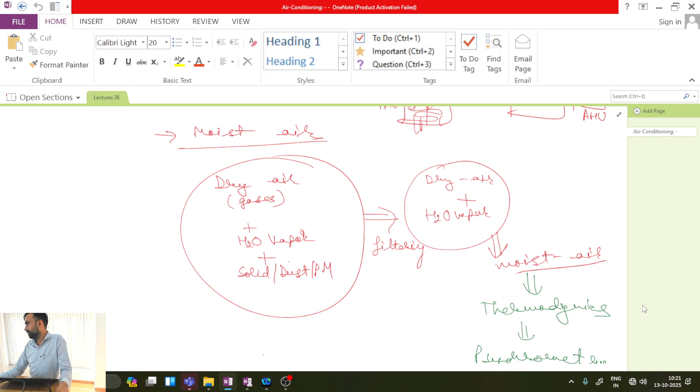We have been discussing air conditioning in the previous lecture. Let us continue our discussion on the same. So, in terms of air conditioning, I mentioned that we may have comfort requirements or industrial applications of air conditioning, and depending upon the function, the season, and the distribution of the equipment, we have studied different classifications of air conditioning systems. Of course, whenever we were discussing all these classifications, we discussed in a broader sense. We did not go into much technical detail of the system.

So, in order to design an air conditioning system and to understand all its technical details, we must have the knowledge of properties of moist air, because ultimately moist air is the participating medium in addition to the refrigerating system which is used for processing of the moist air.

So generally in our atmosphere we have dry air which includes many gases. If we talk about the atmosphere, what is the composition by volume? 78 to 79% of nitrogen, 78 point something. So if we do the approximation, then almost 79% by volume is nitrogen and 21% by volume is oxygen. However, these percentages are 78 point something and 20 point something, and in addition, close to 0.98%, we have many other gases such as CO2, argon, helium, etc.

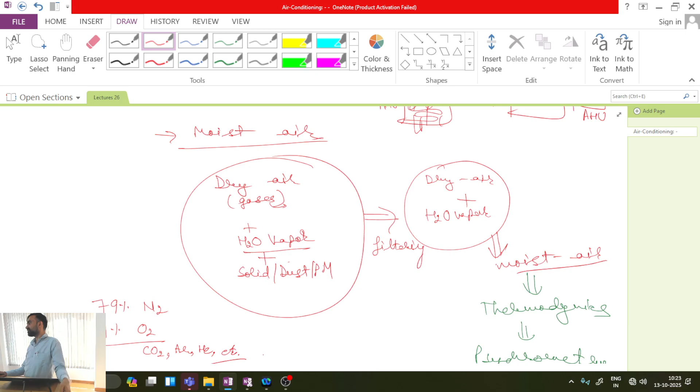However, whenever we are processing the air for certain industrial applications and human comfort conditions, our first criterion is that these components must be removed. When we remove these components, ultimately we will have dry air and water vapor. Now, purely on human comfort conditions, we cannot survive in a scenario where we have only dry air and no water vapor. So for human comfort conditions, relative humidity close to 54% or 56% is required. So for different industrial applications as well as human comfort conditions, there must be some fraction of water vapor present in the air.

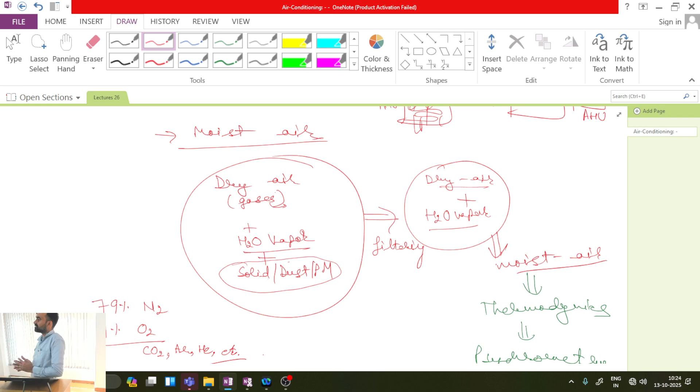Dry air is a mixture of different gases, and the boiling point of these gases is very low. So for all the gases, nitrogen, oxygen, carbon dioxide, etc., we are significantly away from their critical point. That means, relative to their critical temperature, their temperature is very large. And we know from the generalized compressibility chart in thermodynamics that all gases whose temperature is significantly larger than the critical temperature mostly behave as ideal gases. Is this clear? So for all these gases, I can assume ideal gas behavior.

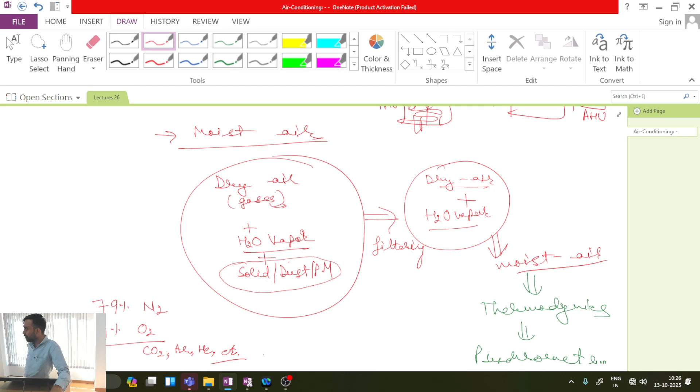However, I do have water vapor present, so I also need to determine the properties of the water vapor. We know that water vapor under certain conditions can behave as an ideal gas, but it cannot behave as an ideal gas for all temperatures and pressures. That's why we need to properly estimate the properties of this moist mixture of dry air and water vapor. So the science that deals with the thermodynamics of this type of moist air is referred to as psychrometry.

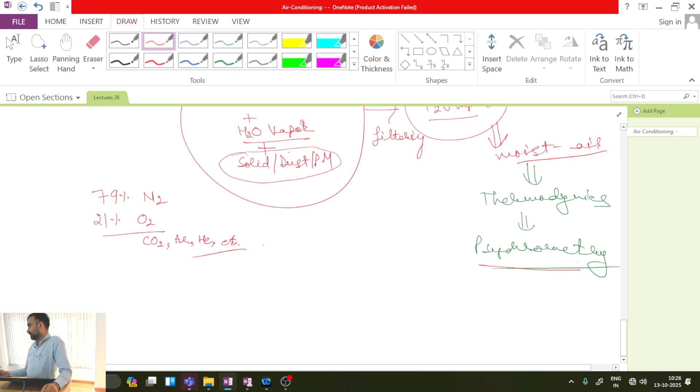Now let's talk about psychrometric behavior. But before that, let us clarify some of the common terminologies. Whenever we deal with mixtures, there is one important law which is known as Amagat-Leduc's law. Can you tell me what this law is? If I have a mixture of gases, say A, B, C and D, and I apply this law, what will I get? If I consider this classroom with 4 different gases A, B, C, D, what will I have?

Of course, the room will have some total pressure. The total pressure of the room will be the sum of partial pressures of all the components A, B, C and D. And if the mixture is properly mixed, the temperature of the mixture will also be almost the same. Is this clear? So if I assume the same total pressure P and the same temperature T, and I segregate out A, B, C and D, what will happen?

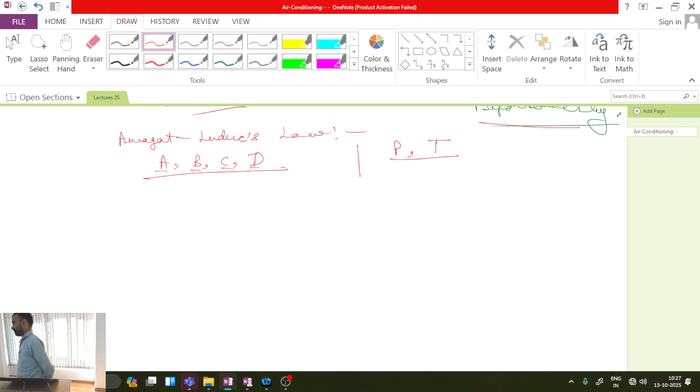Whenever all A, B, C, D are present as a mixture, say these are forming total volume V at pressure and temperature of P and T. Now, if I segregate all the gases such that the individual component is having pressure P and temperature T, what will I be getting? Right now, their total pressure will be nothing but partial pressure of A plus partial pressure of B plus C plus D. Right now, that will be forming the total pressure.

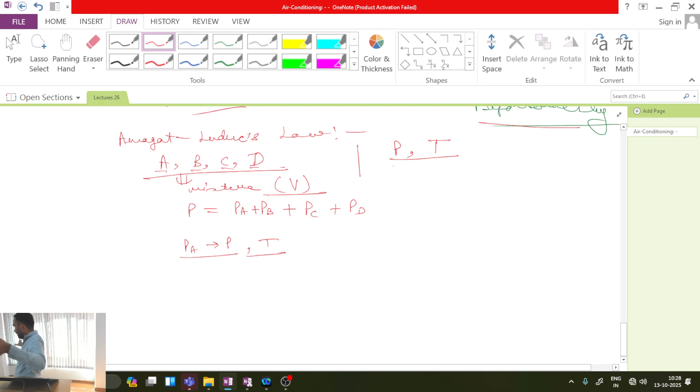But I am saying that if the partial pressure is made equal to P, okay, at the same temperature T, what will be happening? Right now, all the gases A, B, C, D were occupying the entire room. But when I am segregating gas A, then gas A will be occupying some lesser volume in order to produce the same amount of pressure. Is this one clear?

So ultimately I will be finding that, say this is VA as the volume of gas A at pressure and temperature P and T. Similarly, VB is the volume of gas B at the same pressure and temperature. Likewise, VC and VD. What ultimately will I be getting? As a mixture, their entire volume will be V at the same pressure and temperature T.

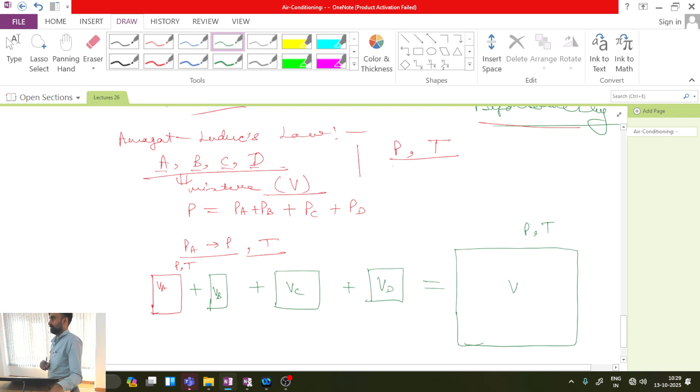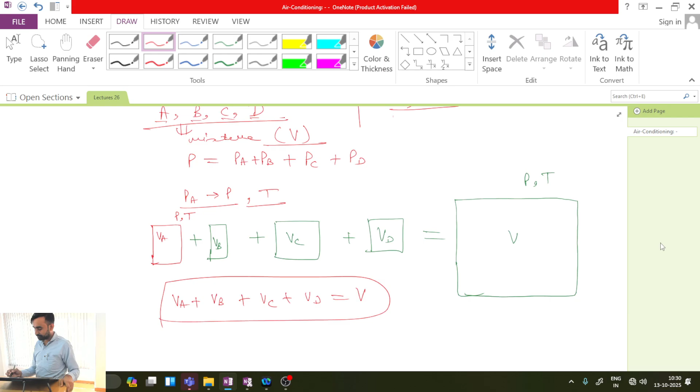Is this one clear? So, Amagat-Leduc's law says that if I maintain the same pressure and temperature for individual components as that of the mixture, the sum of their partial volumes will be equal to the volume of the complete gas mixture. Is this one clear? Anyone having any doubt about this? Please tell me. All are clear with this?

Then next is Dalton's law. What does Dalton's law say? What are the constraints now? Have you not studied Dalton's law of partial pressure for gas mixtures? Studied? So what does it say? Yes. First point is volume and temperature have to be same. So if you maintain same volume and same temperature, then for the same total V, so this was total volume and this was temperature.

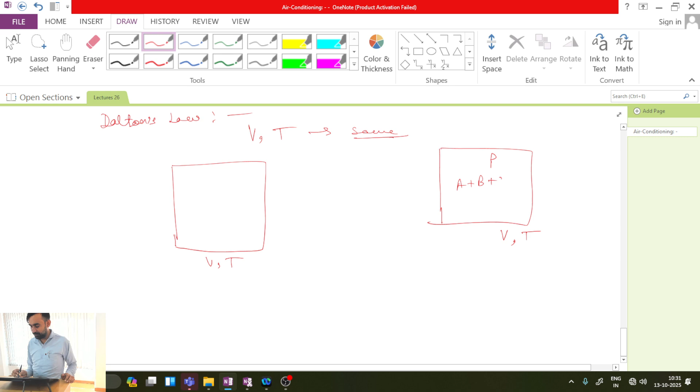Say total pressure was P. Now if in the entire volume V and temperature T, instead of taking the entire mixture A plus B plus C plus D, I only take single gas A, what will be happening? Pressure will be less. Okay, so its pressure will be equal to PA. Likewise, if I take only gas B, then pressure will be PB, PC, PD, and if mixture pressure is P, then it is for sure that PA, PB, PC and PD will be less than P.

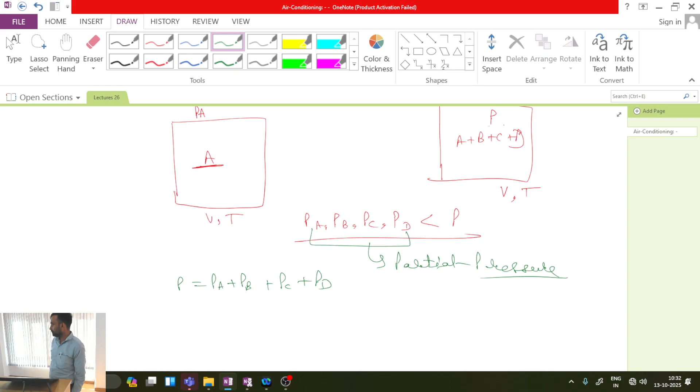Okay, so the pressure of a particular component at same volume and temperature is called the partial pressure. Is this one clear? At same volume and temperature as that of mixture, whatever pressure the individual component applies is called its partial pressure. And the sum of the partial pressures is the total pressure, PA plus PB plus PC plus PD. Is this point clear? So these two laws are very, very important for deriving the properties of moist air. Is this one clear?

Now let's come to moist air. In moist air, I have two components: one is water vapor and the other is dry air. Is this one clear? Water vapor and dry air. So in order to understand the properties of moist air, we first must know the properties of dry air and of water vapor. And as a combination, whatever properties I get will be defined as the properties of moist air. Is this point clear?

Typically, dry air at ambient pressure and temperatures near ambient can be easily treated as an ideal gas. And I have already told you why we treat this as an ideal gas: high temperature in comparison to its critical temperature. Okay, so relative to the critical temperature, temperature is high. Relative to ambient, it may not be high.

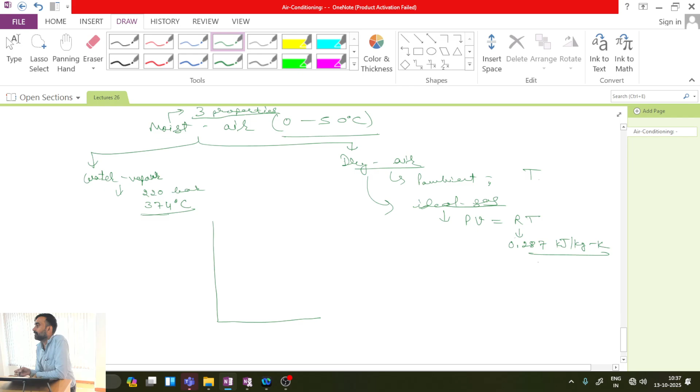Is this point clear? Now we know that if we have some gas which is just following ideal gas behavior, then enthalpy will be only function of temperature. Is this point clear or not? For dry air, enthalpy will be strongly function of temperature. Okay. Now, this dry air is close to ambient pressure and ambient temperature, and mostly in air conditioning applications, we will be operating in the range of 0 to 50 degrees Celsius.

Okay. So, for the range of 0 to 50 degrees Celsius, my specific heat of air, Cp of air, can be assumed to be 1.005 kilojoule per kg Kelvin. Is this point clear? So Cp is a fixed value, 1.005 kilojoule per kg Kelvin. Now, because for air conditioning I am operating from 0 to 50 degrees Celsius.

If I assume that for dry air I have set my reference state at T equal to 0 degree Celsius, what I will be getting? Please tell me. If my reference state is T equal to 0 degree Celsius, what I will be getting? Let's assume enthalpy at this point is 0. Enthalpy of the dry air at T equal to 0 is nothing but equal to 0 kilojoule per kg. So this I have set as reference state.

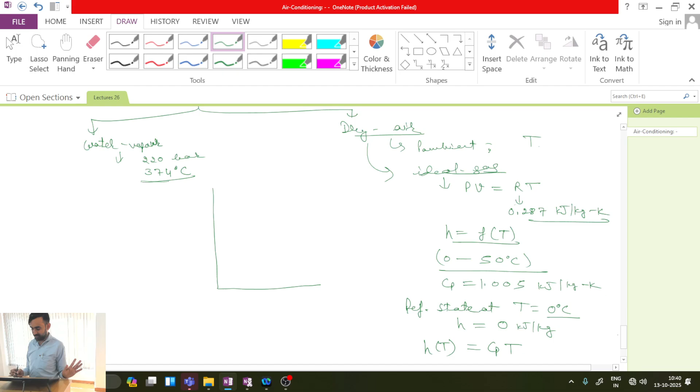So now if I have to calculate enthalpy at any temperature T, can I simply write Cp times T? Because H at T minus H reference, which is 0, equals Cp into T minus T reference, and T reference is again 0. So H I can simply write as Cp into T for my air conditioning applications. So the enthalpy of the air can be simply written as 1.005 times temperature, and unit is kilojoule per kg. All are clear with this point?

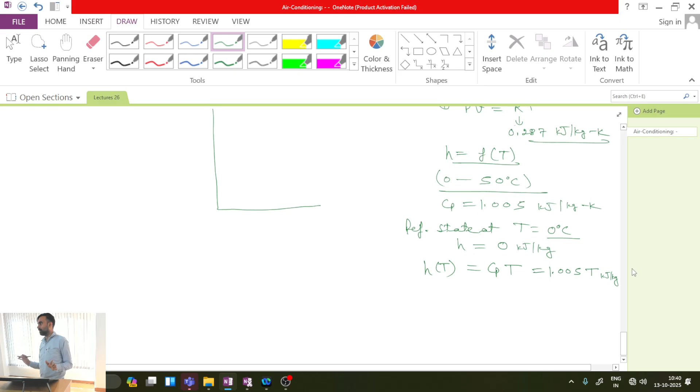Now let's talk about water vapor. If I plot temperature entropy diagram for water vapor, the range of temperature in which we are operating is less than the critical point, because this is my Tc. And as a whole, we are majorly interested in enthalpy, because enthalpy will be actually participating in different processes, and that too, whenever I am talking about

the moist air, in moist air, my water will be always present in which phase? Liquid or vapor? Liquid phase. In moist air, water will be present in which phase? In this air, there is some water. It is in which phase? Vapor phase. Okay, so on this TS diagram, I must focus mainly on the vapor phase.

So if I go to vapor phase, this is constant enthalpy line in the vapor phase. What is your observation? These are different constant enthalpy lines, for example, H1, H2, H3, H4, H5. And what are constant pressure lines? These are constant pressure lines. Okay. So in upward side my pressure is increasing.

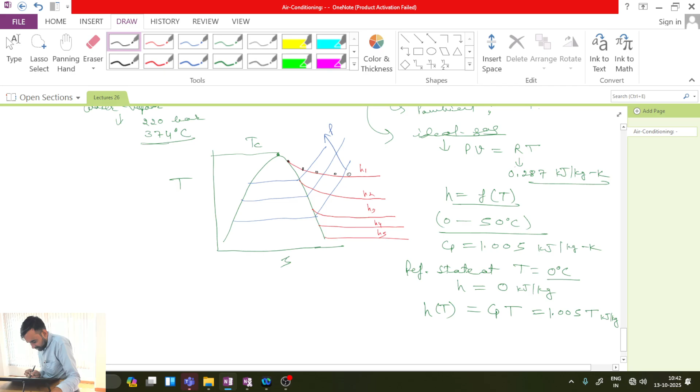So when I am operating at nearly higher pressures, you can follow any of the line and you will be finding that enthalpy is both function of temperature as well as pressure. Okay, because whenever you are moving from this point to this point, your enthalpy is changing. Is this point clear?

From this point to this point, when you have come, your enthalpy has changed or not? You have moved from some H0 line to H1 line. Okay, so your enthalpy has changed, pressure has also changed, temperature has also changed. So it means at high pressures, enthalpy is a function of both pressure and temperature for water vapor medium. Okay. However, if I go to very low pressures, in the low pressure zone, now you see, at a given temperature, the value of enthalpy is what?

Line is horizontal. So this entire line is having the same value of enthalpy. And at this particular temperature also, the enthalpy is remaining constant. At some other temperature also, some other unique value of enthalpy. So if I keep on moving pressure lines over here, I am moving towards the low pressure side. So now if you see, at this pressure line also, at this pressure line also, enthalpy is the same. So if temperature is constant, then enthalpy is not changing with the pressure.

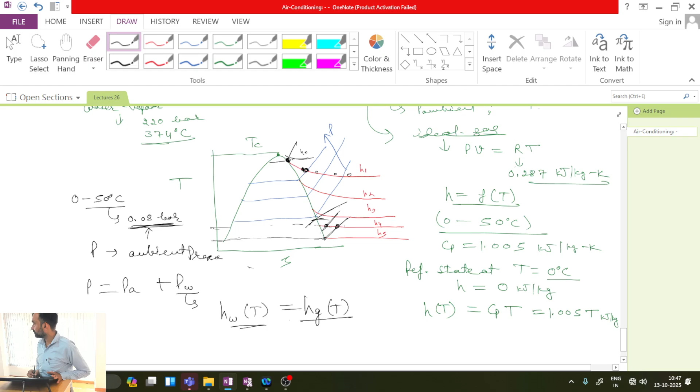Now let us consider that I have Ma as the mass of dry air and Mw as the mass of water vapor, and together these form M, which is the mass of moist air. Now you tell me, what will be M? Ma plus Mw. All are clear with this point? Similarly, if I write the total pressure P, it will be equal to the pressure of dry air plus the pressure of the water vapor.

So this pressure of water vapor is something which is called the partial pressure of water vapor. What will we be calling it? Partial pressure of water vapor. And this partial pressure of water vapor can have some maximum value. What will be its maximum value?

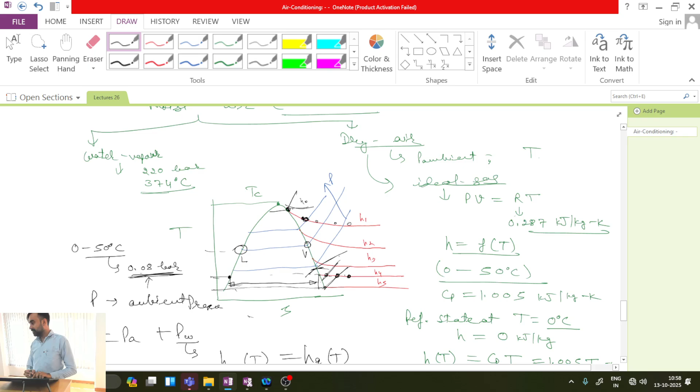See, if you have a substance, first you will have liquid enthalpy up to the saturated liquid point, then from saturated liquid to saturated vapor, HFG, the latent heat of vaporization. Then from this state to this state, there will again be some sensible energy. That sensible energy I have written as H dash G at T. Is this point clear?

Now the first point is that at T equal to 0 degrees Celsius we have set our reference state. All clear about this point? So at T equal to 0, HF must be 0. Let me stop at this point.